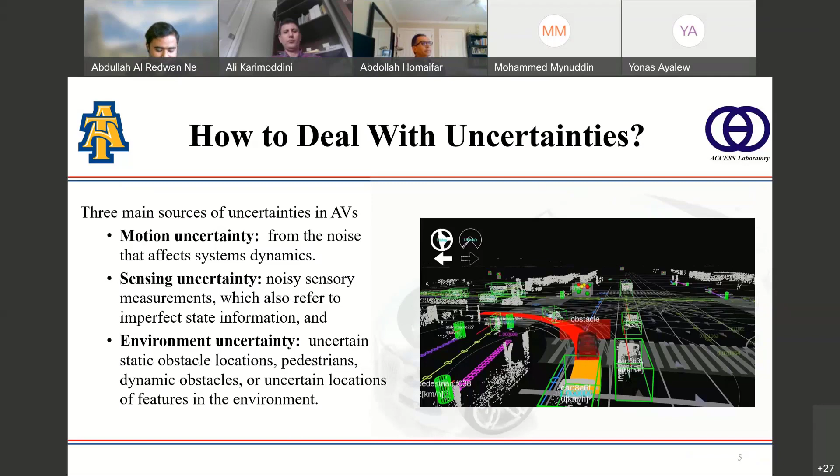So to summarize, in classical planning we assume that all the elements of the environment are known, and we just compute the solution before ever actually executing an action in the environment. But the problem is, what if the agent doesn't know all the elements of the environment? That precludes it from being able to plan a solution beforehand.

This is where reinforcement learning comes in, which enables us to consider the known part of the system and gradually learn the unknown part via search and

trials and error and reward-based interaction. So there are basically two types of reinforcement learning, and we can categorize them by asking a simple question: can the agent make a prediction about what the next state and reward will be before it takes each action? If the answer is yes, we call it model-based reinforcement learning, otherwise it's model-free reinforcement learning.

Reinforcement learning is aimed at finding the sequence of actions that an agent should take to maximize a long-term reward. This sequential decision making is usually modeled as a Markov decision process, where at each time the agent chooses an action based on a policy with the aim of maximizing its value.

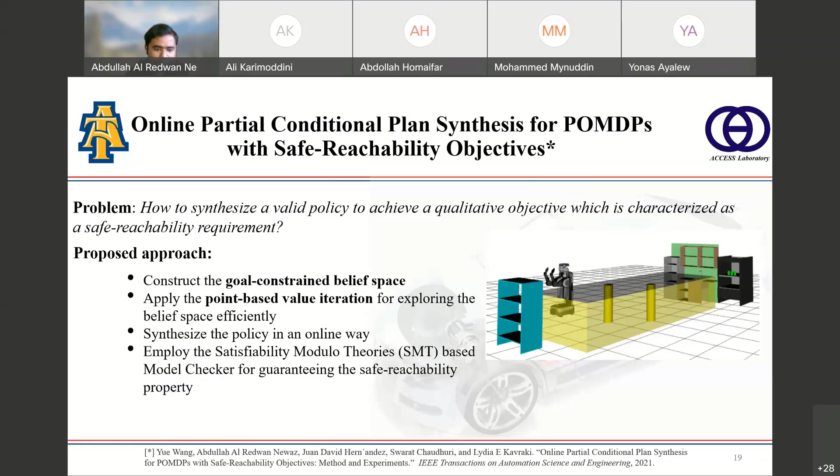Mathematically, we can formulate this POMDP with a qualitative objective: safe-reachability. In our setup, we are given a POMDP as an environment, an initial belief as the robot's initial position, a replanning probability bound, the safe-reachability objective, and a planning horizon. Our goal is to synthesize a valid k-step partial conditional plan, or policy, subject to the replanning probability bound.

Our approach constructs a partial conditional plan parameterized by replanning probability. The idea is that in online planning, you cannot predict every situation. So when the replanning probability is higher in a particular state, you may need to replan online rather than offline. But the rest of the partial conditional plan can be synthesized offline.

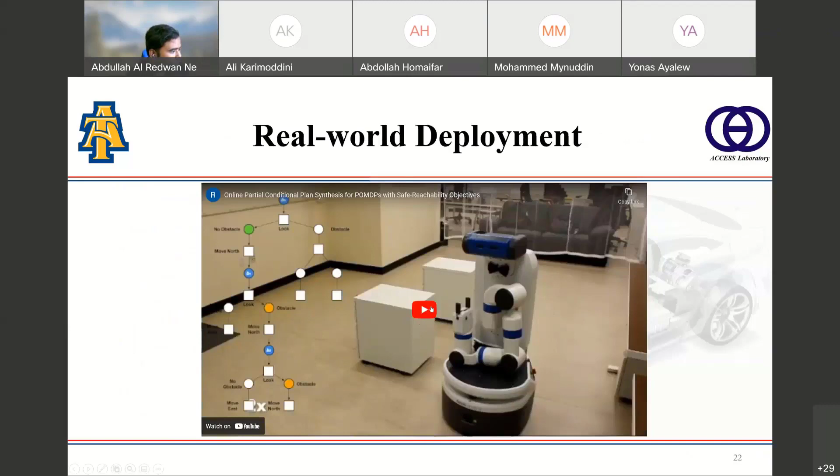This work is a joint work between my colleagues at Rice University and myself.

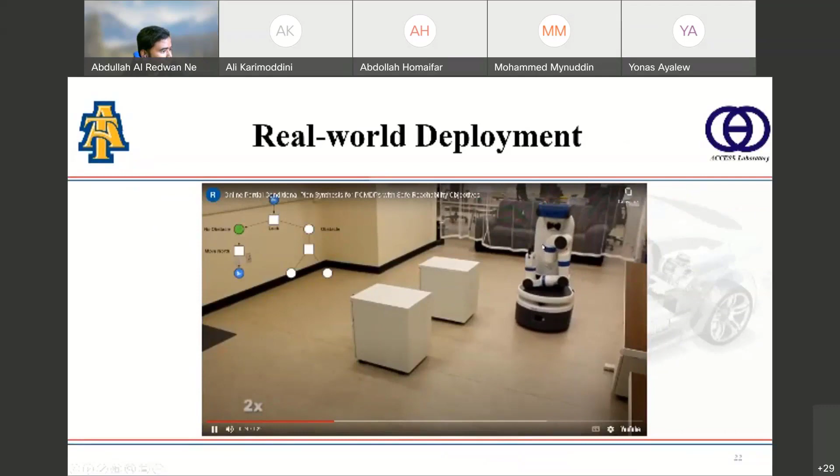In this video, you can see a Fetch robot, which has a 7 degree-of-freedom arm and a head-mounted camera, and a base with differential wheels to navigate. For this robot, the cabinets are uncertain to the robot. Initially, the robot has a plan that reaches from these locations to the corner locations, which is partially observable as of this moment. Then when the robot sees these obstacles, the policy starts to branch out.

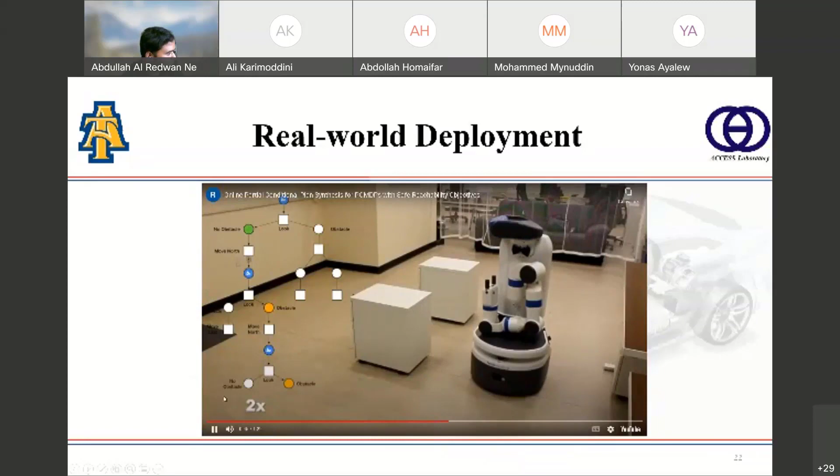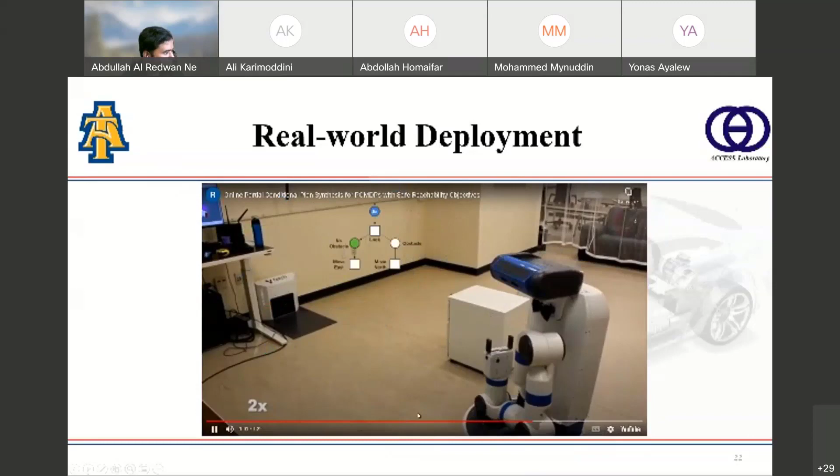This comes from online planning. So when you have no feasible plan, you can replan based on your current state. When the robot reaches a particular state and there's no valid plan, the robot replans for that state, and navigates to the goal location successfully without hitting any obstacles. So our safe reachability requirement is satisfied.

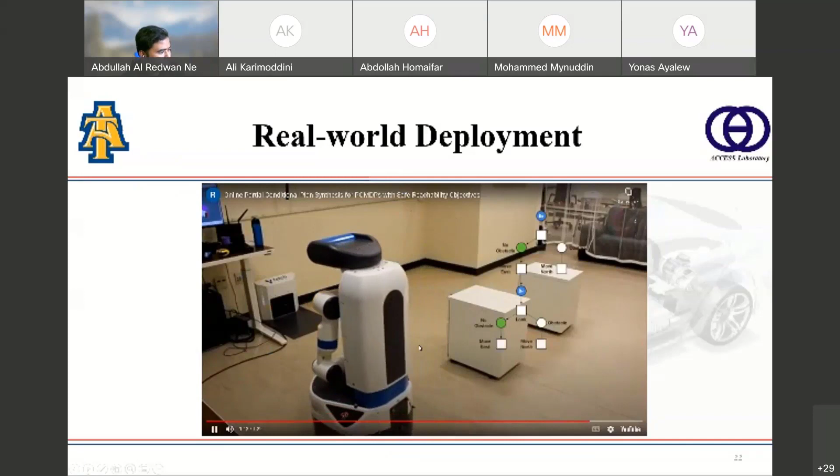Now we talk about point-based value iteration. We can construct a small belief space and do dynamic programming, and it still works well for small-scale POMDPs. But when we want to scale this for large-scale POMDPs, it doesn't scale well because the dynamic programming is very expensive.

An enabling idea behind scalable domain-independent POMDP algorithms has been the notion of Monte Carlo sampling. A particularly successful algorithm, often known as POMCP, proposed by David Silver in 2010, searches for an optimal policy using a particle filter and Monte Carlo tree search. Silver used the particle filter to approximate the belief space and Monte Carlo tree search to efficiently synthesize an optimal policy.

Later in 2013, the team of David Hsu's group from the National University of Singapore proposed an improved algorithm called DESPOT, which reduced the variance of the Monte Carlo tree search with theoretical guarantees. Hsu used lower and upper bounds over the Monte Carlo tree search to reduce the variance.

In 2019, our group at Rice University focused on sampling-based POMDP planning with safe-reachability guarantees.

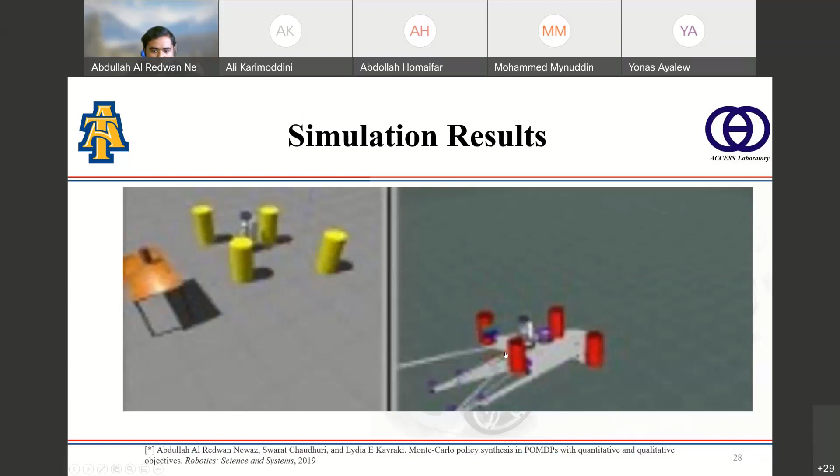Let's see the demonstration. In this video, you can see these yellow cylinders are unknown obstacles for the robot. We significantly increased the number of obstacles, and the robot has a larger grid to explore. As the robot reaches close to the obstacles, it gathers more information from the head-mounted 3D camera.

The robot gains more confidence over these obstacles and changes its behavior based on the synthesized policy. As the robot reached here, it was not very sure there was an obstacle, so it gathered more information. Then the robot became confident, the obstacles turned red, meaning the robot is fully confident, and it avoided this position. Finally, the robot reached these locations to pick up the can.

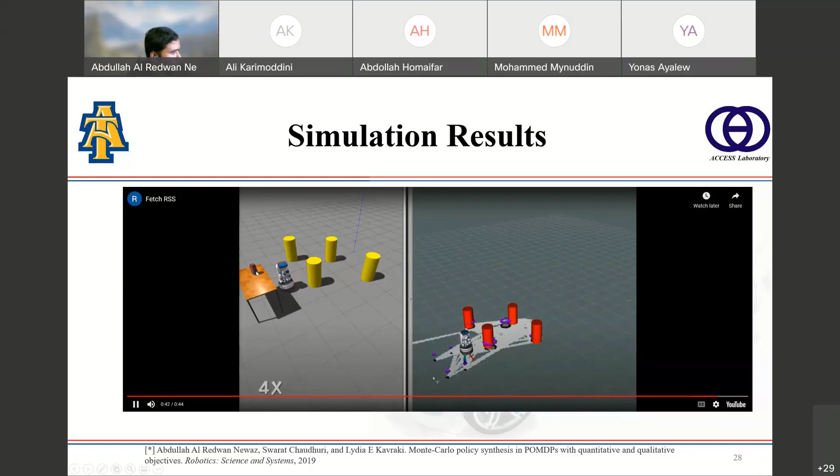So we benchmark our algorithm with our previous algorithms, and we can see the previous point-based approach does not scale well for large scale POMDP. Especially, a 13 by 3 grid is the limit for the previous approach.

But when you use sampling-based Monte-Carlo tree search, we can scale this problem to a larger POMDP with 14 by 4 with 7 states, a total of 1 billion belief states. So we have a belief space whose exact domain is 1 billion, but since we are using a sampling-based technique, all you need to care about is 10,000 samples, and that's good enough to approximate the 1 billion belief space with 95% confidence. So there's a huge improvement in the sampling-based approach.

So now we talk about the sampling-based approach and reinforcement learning. A big issue in reinforcement learning is sometimes we cannot afford to make a lot of mistakes. If we only depend on interaction-based learning, that's not very suitable for safety-critical domains.

So there are two levers we can see in machine learning: one, we can learn from interactions, our machine learns by interacting with the environment. And second, if we cannot learn from interaction, then what do we do? We actually record our past interactions and call them data. So it's the combination of learning and interaction that makes us learn fast. It's not only the interactions.

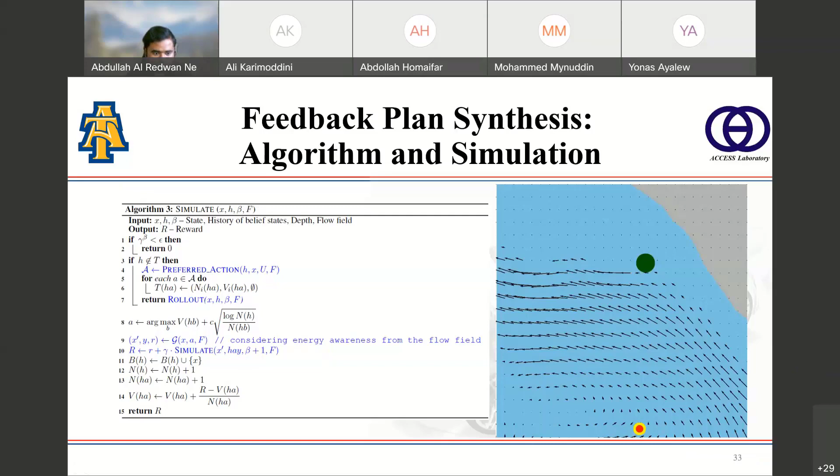You can see the robot needs to go to these locations, but there are ocean currents directed in these locations. Normally the POMDP planner would take a path that is not energy efficient, and maybe the shortest path would be like this. But in this particular video, you see the robot deviating from the shortest path, favoring energy in the planning, and reaching the goal location. It goes along the ocean currents to reach the goal location. This is possible if you consider the constraint.

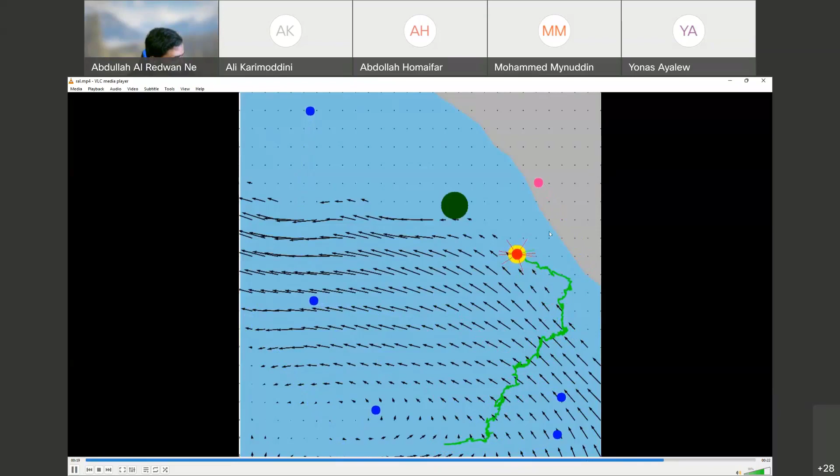If you compare the previous approach to this approach, in this case there are dynamic obstacles in the environment, and the robot has no idea about the dynamic obstacles, and the robot can sense the obstacles when they are close to its sensing boundary. So the robot is actually sampling the world and getting the information where the obstacles are, and also utilizing the ocean current to reach the goal location.

So we also actually deployed our robot in real-world ocean environments, and we compare our ECC POMDP algorithm with the baseline CC POMDP algorithm in terms of the trajectory length, average velocity, and the mission completion time for different kinds of water layers, in the absence of obstacles and in the presence of obstacles.

So in contrast to the existing CC POMDP, which only considers cost constraints, our AUV navigates with higher velocity while following the ECC POMDP policy. Here you can see the trajectory is longer, but the overall mission completion time is faster, because of the simple effect that going against the water currents requires more energy and more time to reach the goal location. So you will be sacrificing your linear velocity and you will have more angular velocity, which is costly.

So our real-world experiments were conducted off the coast of North Beach, Miami, Florida, in the region surrounded by mangroves with shallow water and clear water. Here you can see some blue dots. These blue dots represent the virtual obstacles; the robot has no idea about their position and they can only be detected when they are in close proximity.

And the robot reaches its goal location while avoiding all these obstacles, considering the ocean current, water current, and everything together, and reaches the goal location, which is right here in this area.